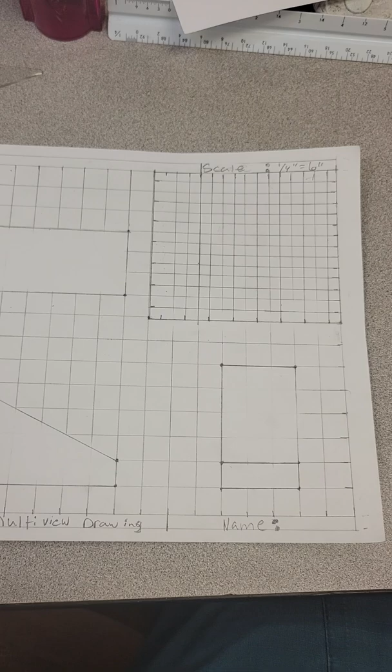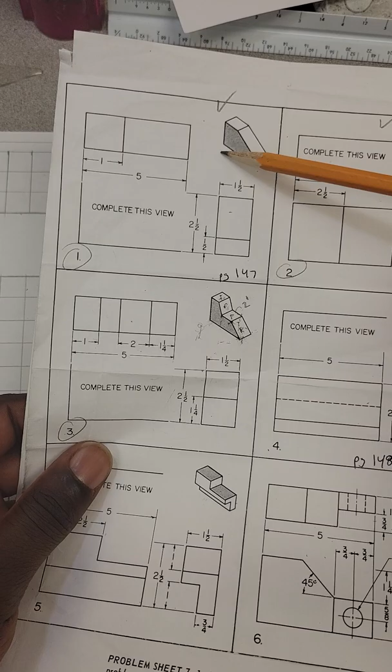So what we're doing is designing this front view, which you did already. We figured out our top, or our front view, which is this entire thing here. Let's mark this out for you. This will be your top, it's your T. And this, if I was looking right at it, my little guy or girl sitting there, it's the front view, which is F.

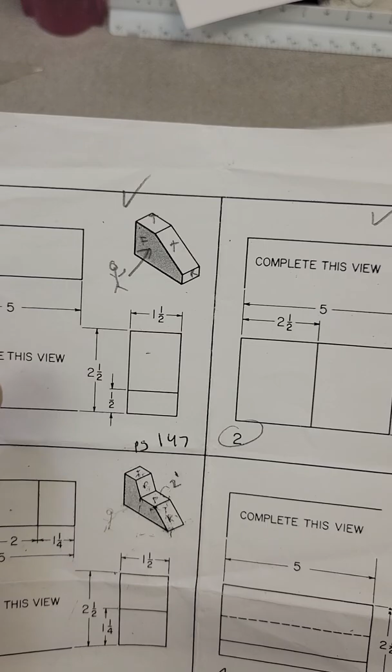All right, we're going to establish our little box. We'll draw this 3D drawing here. Just put that T up there.

Just to recap, I want you to come down over 8 from the top. Use your bigger box to mark out the smaller box. So you'll come over 1, 2, 3, 4, 5, 6, 7, 8. Come down 7: 1, 2, 3, 4, 5, 6, 7. Start that dot right there.

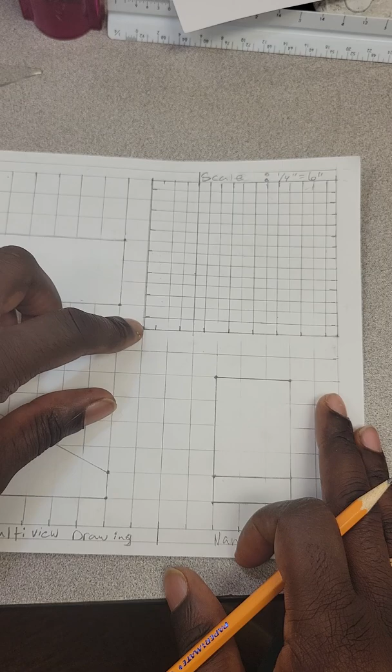Once you get that dot created, darken the box. Trace the line around.

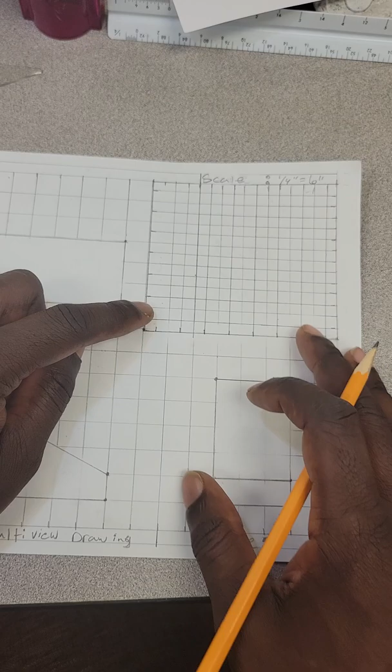That'll be the tornado or hurricane drill, so ignore that. So 1/4 inch that way, knock it out with quarters. Every other one is a 1/4 inch, as you can see: quarter, quarter, quarter, quarter, quarter.

All right, in this case, like I said, all you need is a ruler. We're gonna use a ruler and make this 6. Let's give you an example of your new 0, and I'll zoom in and show you.

And then you get your 1/4 inch that way. So 6 is your new 0, so that's quarter, half, quarter. Kind of cheat a little bit. Again, quarter, quarter, quarter, quarter, so on, with tick marks in between the two halves.

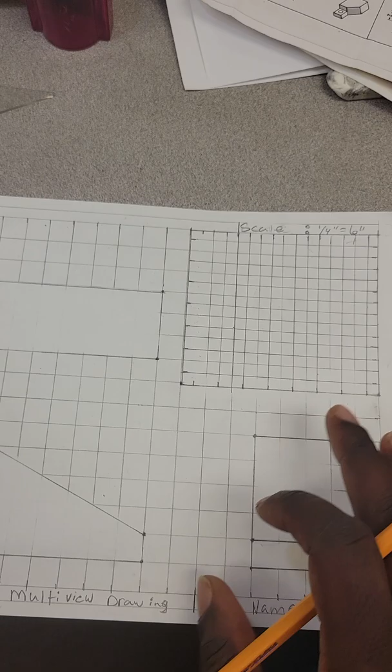All right, so we got that much done. Now let's go ahead and start the 3D drawing to get this bad boy rolling.

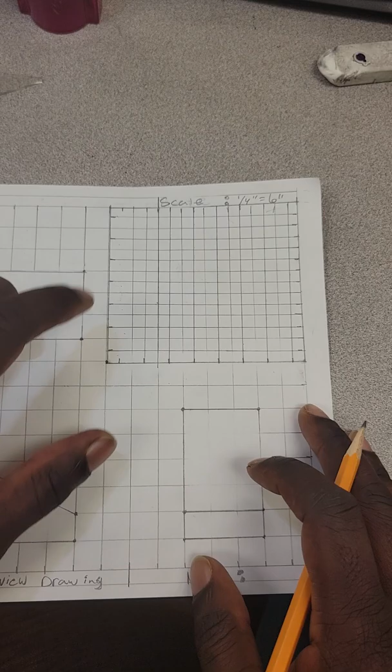All right, so let's walk this through slowly but surely. In this case, we got this going already. We got a 1/4 inch scale up top, equals 6 inches. So this is gonna keep the 6 inches. If we go any smaller, like 3, it's gonna get really long and take too much, so let's just keep to the 6 inches but keep the 1/4 inch.

So every quarter now we measure, it's gonna be our 6 inches, instead of our 1/2 inch equaling our 1/4.

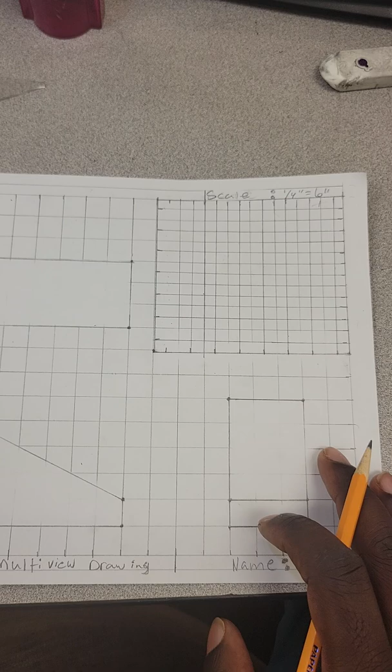All right, so let's get started drawing this thing. What I want you to do is use the bigger box to start your first point in your smaller box. So in this case, let's just go 1, 2, 3, 4, 5. We can go 1, 2, 3, 4, and 5, but we're gonna start right here, that little 1/4 mark right there, over 1.

Oh, I need to make my 1/4 line there. Hold up, I'm missing one.

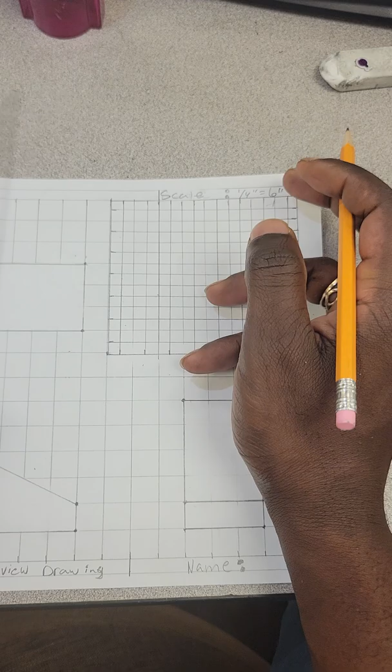All right, 1/4 line, so let's do it again: 1, 2, 3, 4, and 5. Start over right here in this corner, and you'll put a dot right here. So 1, 2, 3, 4, 5, and you come over 1 to start your grid.

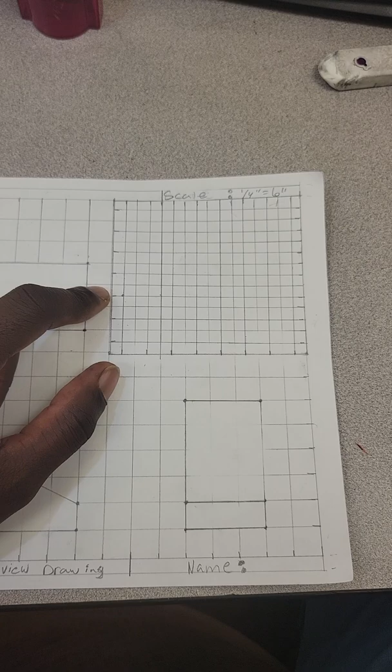And for tick marks, just to check myself, it should be 9 down: 1, 2, 3, 4, 5, 6, 7, 8, 9. Yes, that's your first tick mark.

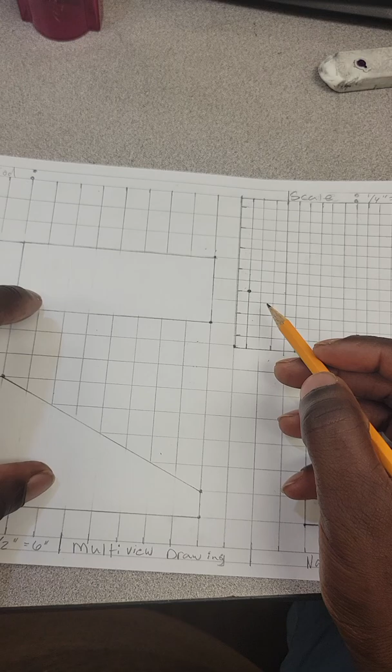So same thing we did with the 1/2 inch to get our front grid, we're gonna redo the same thing with our 1/4 grid. So all we're gonna do with our 1/4 grid is the same thing we did with the 1/2 inch grid.

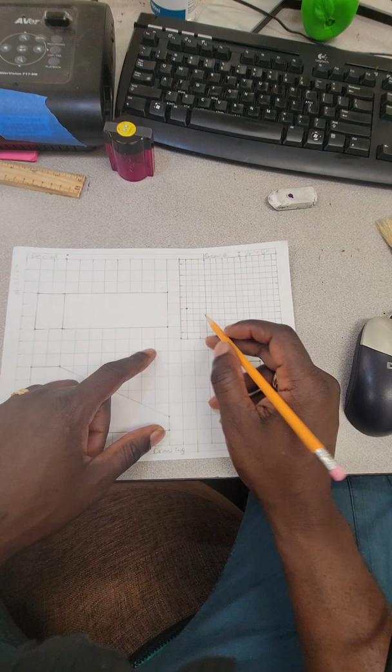So you're gonna start the base at this point. You're gonna come around this way so many, and go up so many on this particular one. In this case, we had to go 1, 2, 3, 4, 5. In this case, we're going 1/4 inch though, so 1, 2, 3, 4, 5. We'll keep it going, 5 tick marks: 1, 2, 3, 4, 5.

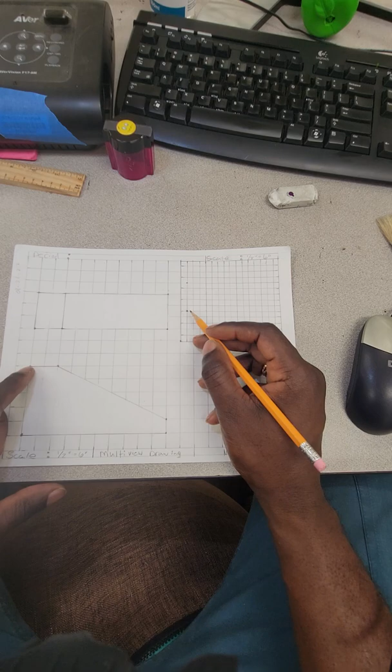All right, and then that'll give us our point here. And we go the same number we went this way. We went 10, so we gotta go 1, 2, 3, 4, 5, 6, 7, 8, 9, 10, to get our front view.

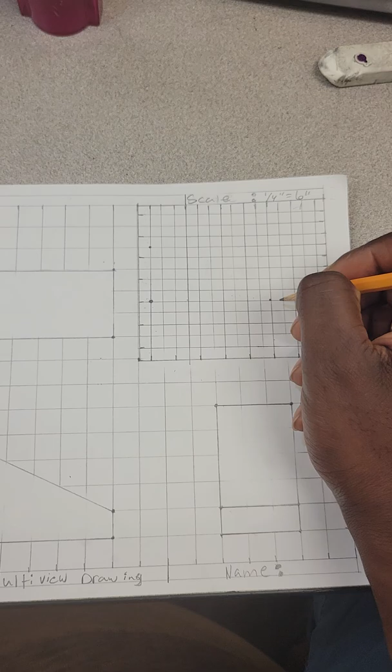Yep, go over 10. Let me zoom in real quick. And then we go up an inch, a half an inch, right?

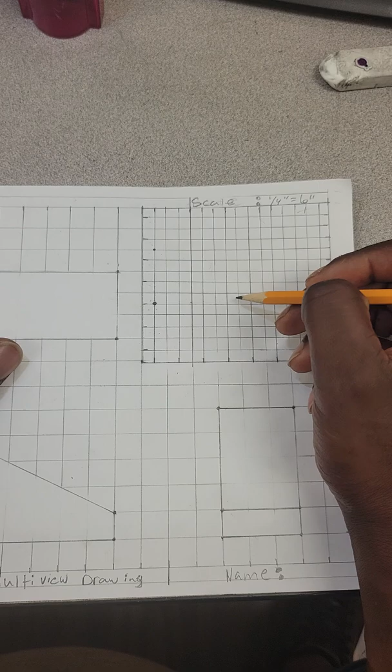Creating our right view. In this case, we're going to do a 30-degree angle at this point. I know in the picture it shows the 30-30, but on this one, we're going to do oblique with a 30-degree angle. In the next drawing, we're going to do a 2 at 30-30. So we'll get back to isometric. Right now, it's oblique.

All right, so let's finish out our top, which is going to be 2 boxes over. Same thing you see on the big one, on the front view. So again, we're doing this now, 1, 2. But now every quarter inch is 6 inches, so it's the same concept, 1, 2.

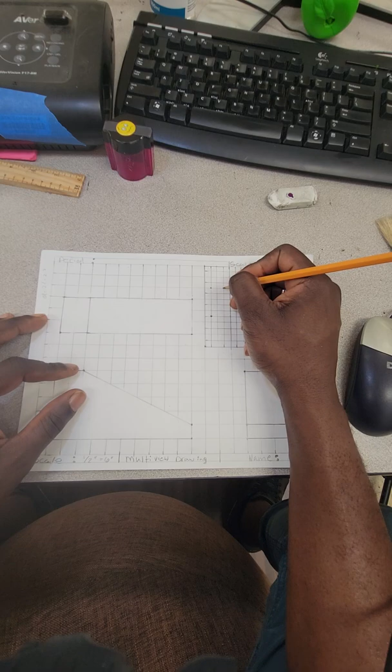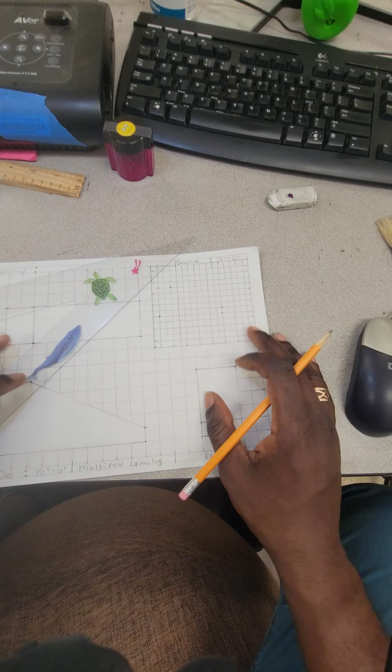And now at this point, we can connect our front view line going this way. Let's just do that. So connect those boxes. Light lines because you don't have to erase. And connect these boxes as well. It's kind of already there already, so you can kind of darken it up a little bit.

Same thing here. Same thing here. All right, so this line is kind of off a little bit, so let's just use a line that's already existent there.

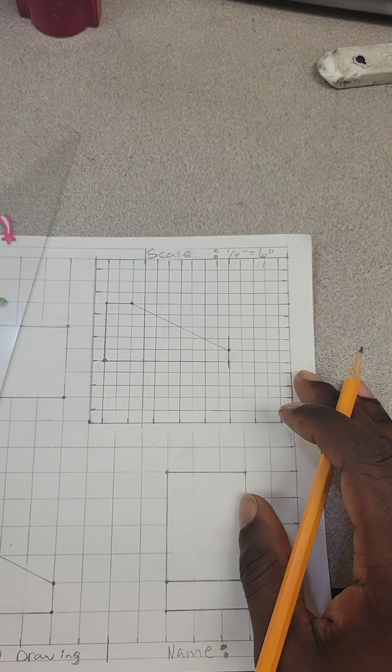All right, now what we want to do is create our 30-degree angle. That's established with the 3, 4, 5 method, or whatever you want to call it. In this case, we're doing a 30-degree angle, so we know 2.5 this way, and then you gotta go 1.5 inches up off this angle here to get our 30-degree angle. So that's 5 tick marks.

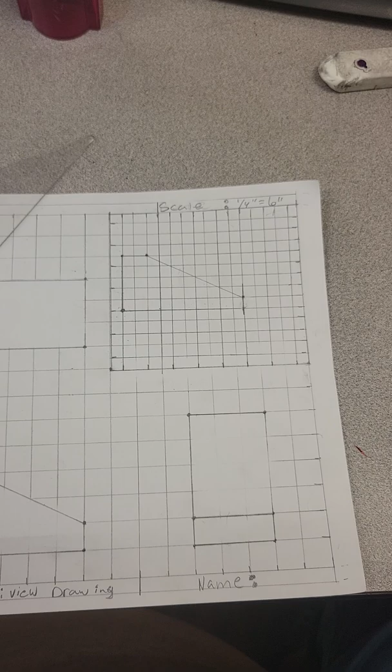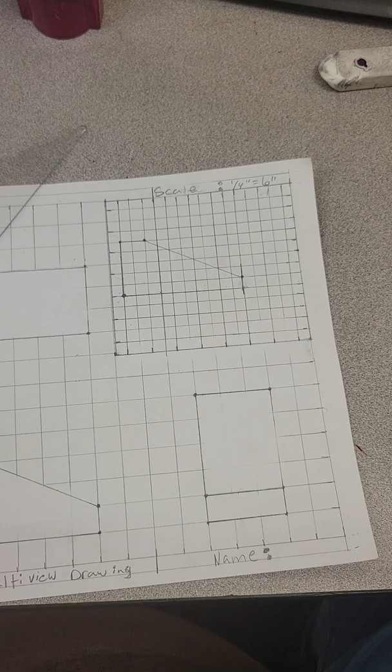And in this case we're gonna go... let's just do this. Hold on one second. All right, so we're gonna create a 30-degree angle. We gotta go 2.5 over, 1.5 inches up. So in this case, we go 1, 2, 3, 4, 5, and then go up 1, 2, 3. This is our mark to create our 30-degree angle, so just make a connection. So again, we came over 1, 2, 3, 4, 5, went up 1, 2, 3, came up 1.5 inches. So this is 1.5 inches, this mark here.

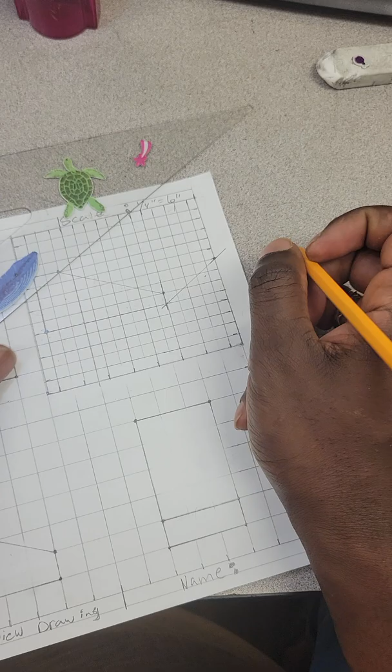And then you're gonna draw the bottom line first. And then we're gonna go up 1.5 inches. Oh, we know this is 1 inch, a half inch. We're gonna come up a half inch to grab this line across here. And this will give us a right view angle.

All right, and this is his benchmark at this point. It's a 30-30. We're kind of going a little ahead of ourselves, but we got this already established at 30. Now we got to come over, just go back to our drawing.

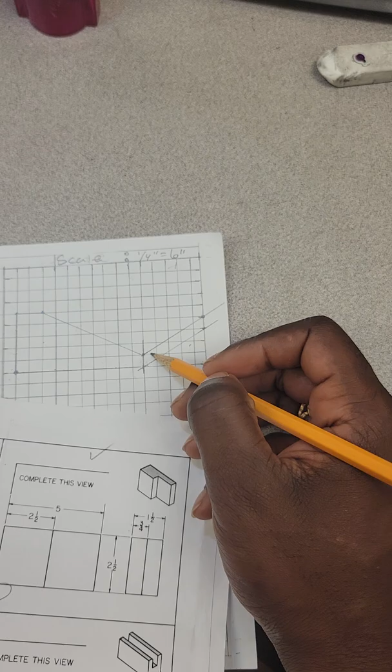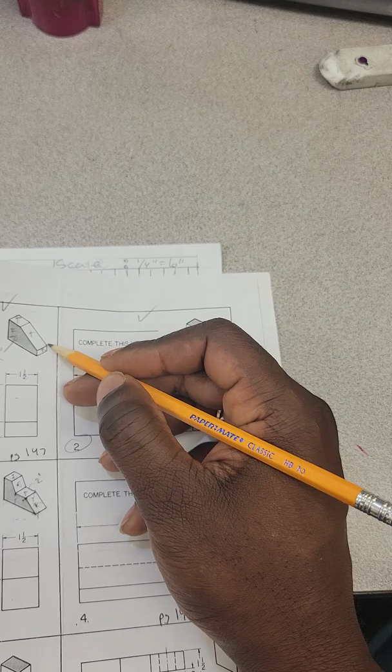We gotta come up, we gotta know we gotta go a half inch. Our line from here to here is 1.5 inches. This is 1.5 inches. So we gotta come up 1.5 inches on this line here, 1.5 inches on this line here to get this little puka right here. So 1.5 inches, because why? Because this is 1.5 inches. We know this is half inch up, which is that. And we had to go 1.5 inches to get this little cube right there.

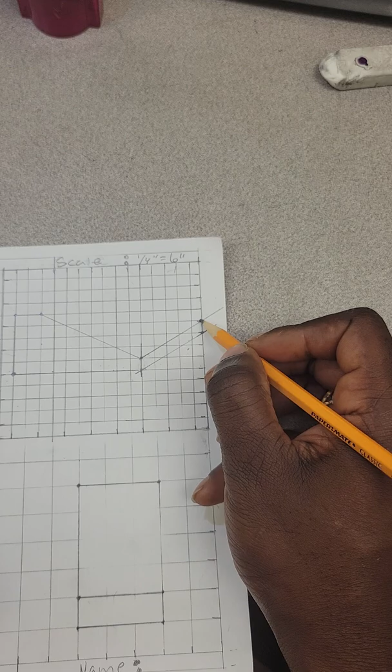So we went up a half inch, came up a half inch. Now we're gonna go 1.5 inches over on our line, measure 1.5 inches. At this point, you can use your ruler. If you don't feel comfortable using a box, you can use your ruler on this one.

And that's to get that line. So let's do 0. Every quarter inch is a half inch. So 1, 2, 3, 4, 1, 2, 3, 4, it's 1 inch. 1.5 inches is right here. And same thing there.

Again, check it. And you're gonna draw your line through here, straight up, cutting through there. Let's just zoom in real quick. We're gonna cut right through the 2 lines that intersect with the line going down, and it's gonna be really tight in there.

And again, I'm up just off that thing. I'm gonna erase that. And I'm gonna go right through there. Check my 1.5 inches one more time.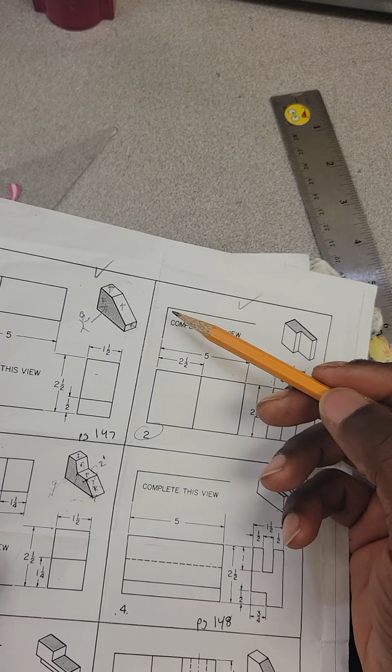It's really tight, and we also got a small drawing. All right, so we got a 1.5 inch line, 1.5 inch line. We're duplicating our right view, which is right here, with this back line. We're establishing it right here, based on this drawing here.

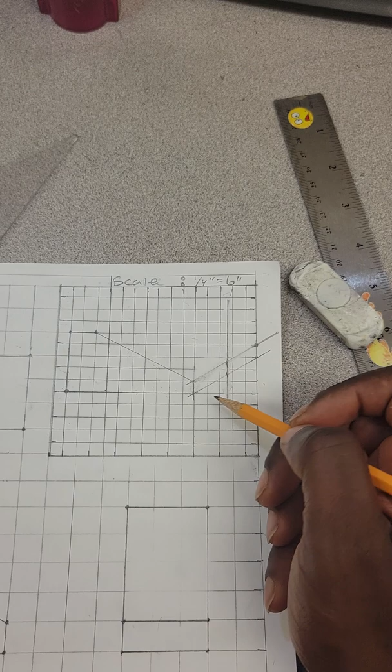Now it's gonna get really easy because we know a couple tricks already at this point, since you watched a couple videos and already know how to start establishing this back line here. In this case, we're gonna do it using the same concept we did down here, 1.5 inches, up 1.5 inches. I'm actually gonna put this in red really soon, so you guys can see the difference of the two we just did, so you know how I got that. So this is 1.5 inches, which is 2.5, and this is 1.5 inches going up. And I just went a half inch more, grab a second.

And then same thing back here. So whatever I did here, I can do the same thing up top to get my two back lines that way.

All right, so to get this back here, we're gonna go 2.5 inches this way, and then 1.5 inches up. So from here, 1, 2, 3, 4, 5, then go up 1.5 inches. 1, 2, 3. That'll give me that back line back here.

And then to get this as well, I'm gonna go 1, 2, 3, 4, 5, up 3, 1, 2, 3, and it'll give me this line here. But I want to be 1.5 inches on this line to get that 1.5 inches on this line to get these two, and they connect to here. I gotta just connect my two lines. So let me just do this right quick.

All right, you don't have to worry about this, but you want to measure 1.5 inches on this line, 1.5 inches on this line, and then you connect this point to this point. Then you have your square point in the back for this.

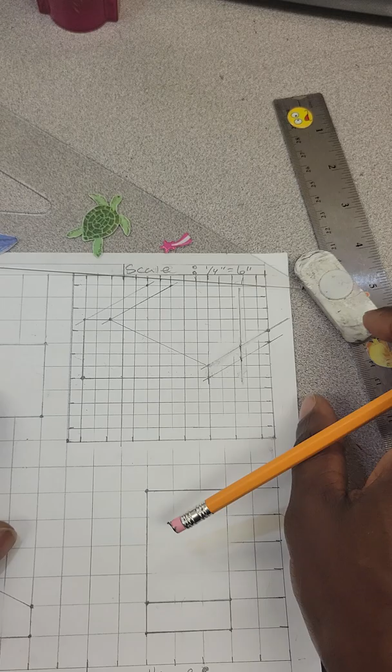Quarter inch and a half. Quarter inch and a half. And you're going to connect these two lines going across here to get your back piece.

All right, I'm going to connect these two, because that's our 1.5 inch mark. And we can zoom in to show what I'm doing. I'm connecting these lines going right through the origin.

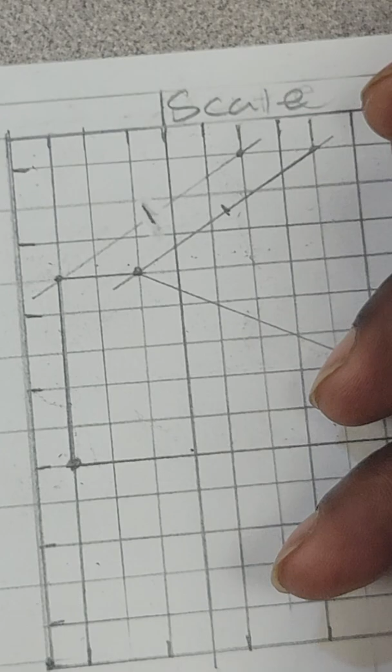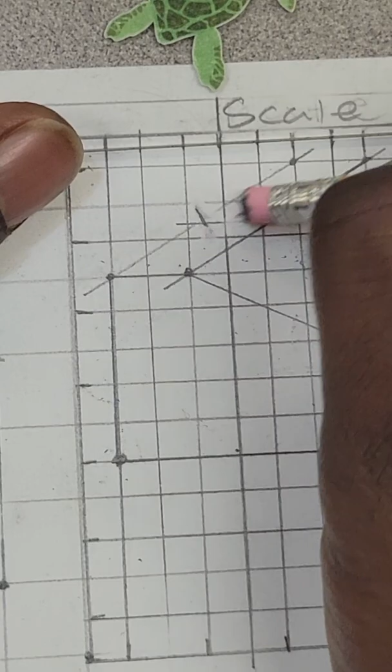Try to get my 1.5 inches looking better. I'm gonna connect these two lines going right across it. Let's get that line a little better.

Kind of tricky because it's so small when you're trying to get in there with this. Might as well erase this too, because what's going to happen is we're going to actually make this where you can see the actual 3D model.

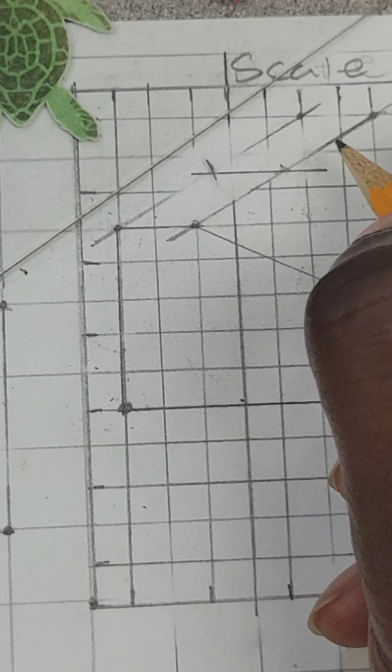Cheat off like a 16th off, so you get that pencil lead through there, and connect that line again. So cheating it off the line about a 16th kind of gets you back on top of that line.

All right, so at this point we're going to go ahead and start getting this line up down here too as well. The lead on this, the eraser on this pencil is not so good. All right, now we're just going to connect the two points, this point to this point.

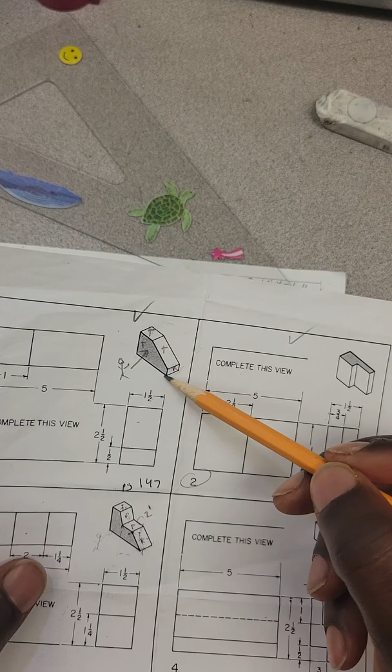Again, that drawing is off of 30-30, but I'm gonna save that for another day, so I won't confuse you guys so much when it comes to this. So this is an oblique drawing, on a 30. So when you look at the picture, it's not gonna be so much like this one because this is on a 30 and an angle at a 30. So it's 30-30 here. We went from straight, then 30. So we're getting half of the view, but on an oblique angle.

And I'm gonna erase this center mark. We don't need it, but I'm gonna actually put in some red tick marks to show you how we found our angles. So we went over 1, 2, 3. Let me show you now. This yellow shows up, I think that shows up well. Let me get another color for you.

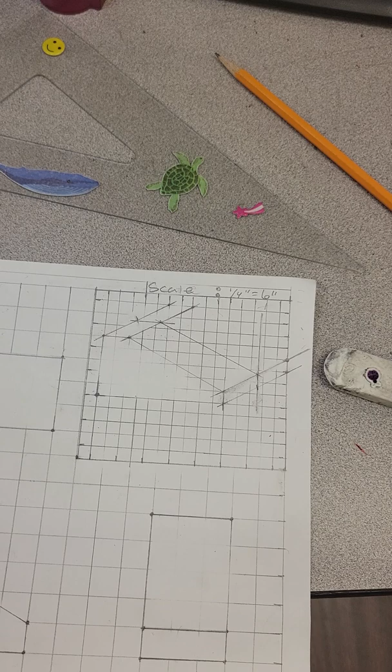Alright, to show you what we did, we came over 1, 2, 3, 4, 5, and we went up 5. So we went up these tick marks here. These are hidden lines again. This is your 1.5 inches. So you go 1.5 inches, 2 inches this way.

So 1, 2, 3, 4, 5. Again, the common number for a 30-degree angle is 2.5 inches. 1, 2, 3. We got here. So we got this part in the back. Now to get this one, it's the same concept. To get this back number, which is an inch, between here is an inch.

We came over 1, 2, 3, 4, 5, and we went up 1.5 inches, which is 3 tick marks. So when you're confused, just go by the tick marks and it'll get you what you need. And the same thing here. We went over 1, 2, 3. I'm doing hidden lines to get these points to you. And then we get this as well.

And this is how we created that line. And then we went 1.5 inches up, or 1/2 inch up, because this thing is boxed at 1/2 inch. And you connect these 2 points. And this is how you do oblique 30-degree angle drawing to get these. And you connect that. Let me erase this so you get a better picture. And that's pretty much it right there. Let me darken this up.

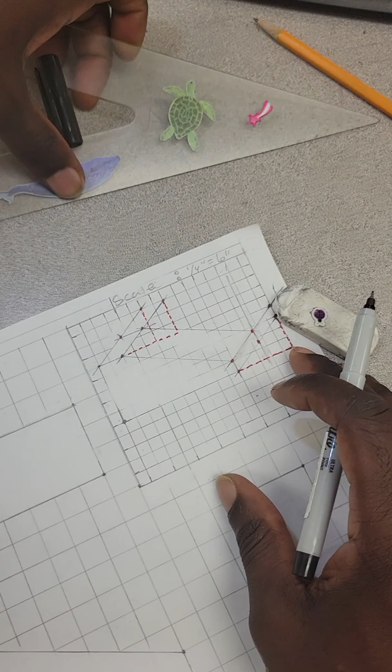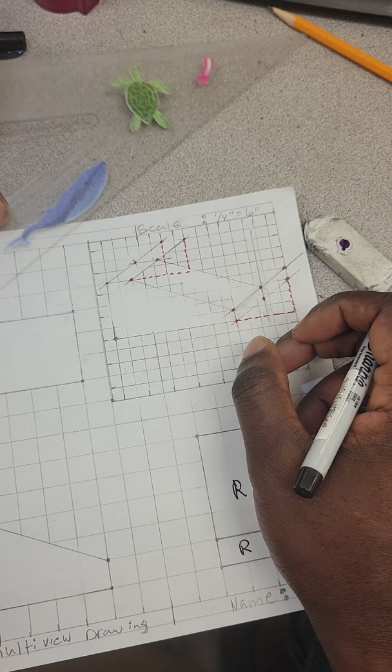Oh, in this box here, let's go ahead and put your T for top, F for front, and then R for right. And this is another R for right. And I'm gonna darken this up. So we did this on a 30-degree oblique drawing, which means if you go back in the video, it shows you exactly what you have to do to find that.

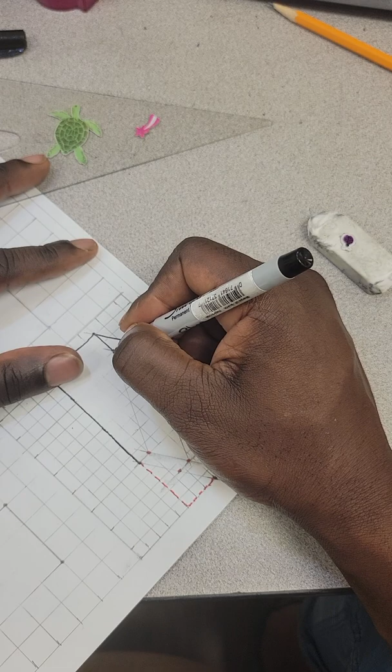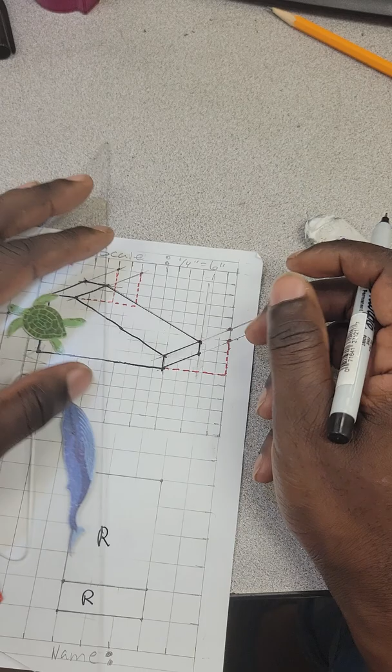Alright, come and get this angle. Sorry, blue. We're gonna erase everything we don't need. That's actually your points you need right there, and these are just extension lines off the original grid to give you a better understanding of what it took to get to here and here.

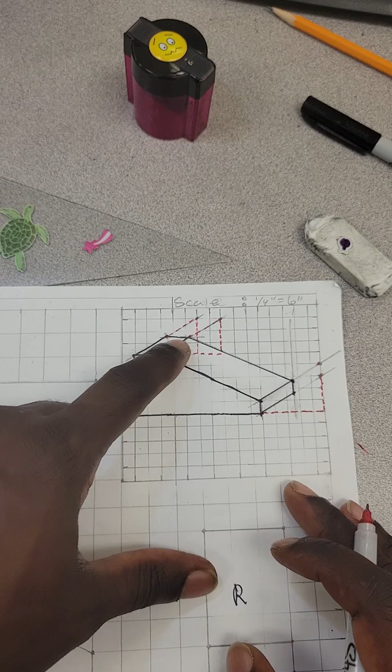So these again are indicators of your 30-degree angle. You did your 2.5 inch, came over 2.5 inch to get this point, and then they get this point, and you just measured on this line. You created an inch and a half, an inch and a half. Why? Because this indicated to you that this back here is an inch and a half, inch and a half, and that's how you find your angle to match these angles down here.

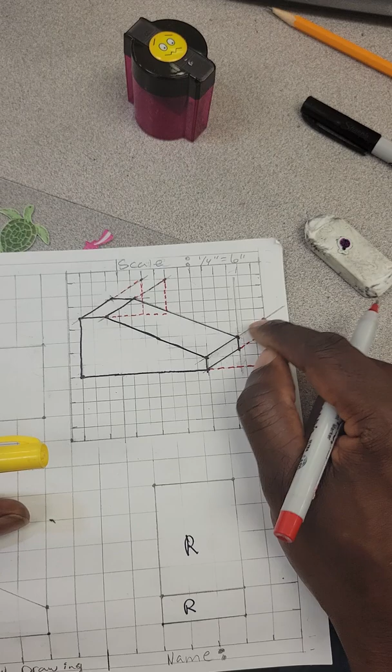And again, I'll just make these lines here. And this came up an inch and a half, a half an inch to get to here. So I'm not gonna put too much in there, but that's exactly what you'll have. Let me zoom up. And that's your overall dimension of your oblique drawing at a 30-degree angle.

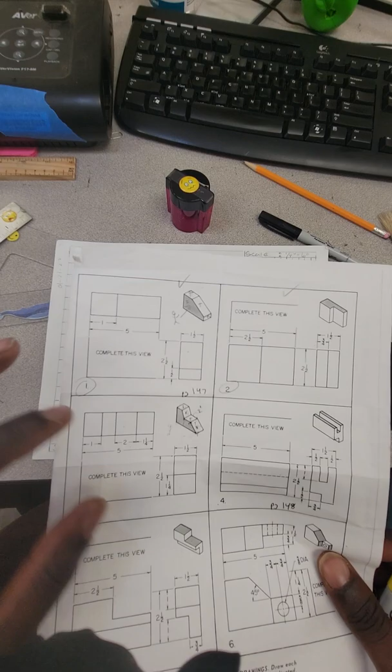Again, this is on the 30-30. We'll get to it. We'll put this on the 30-30. So you get enough 30s, and don't worry about that. You'll get some 30s in. But this one, I just want to make sure to show you guys how to do oblique drawing. If you want to train on oblique drawing, and then go 30.

So let me erase stuff we don't need anymore so it can stand out better. When you outline it first, then you can erase what you don't need. Then you can see the actual picture much better. And do use a straight edge when you're tracing. It helps keep the lines crisp. And we'll get rid of this stuff in here.

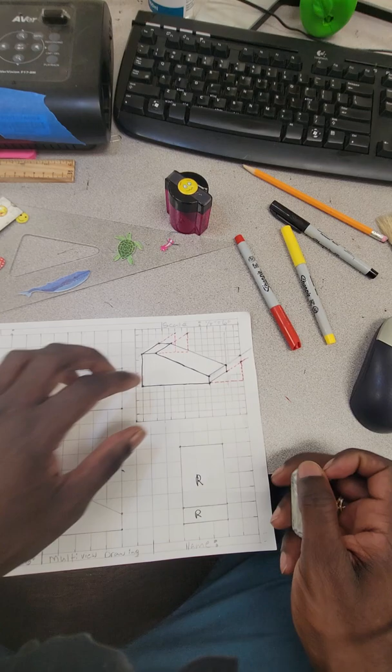Again, you leave up grids on the outside, but then you can use them to track it. You know what you did by using these lines here. You know, inch and a half, just to make it clear to you what you're doing. You can count 1, 2, 3. Again, if you have a hard time figuring out how to do the 2.5 by 1.5 to get the 30-degree angle, just count 5 tick marks to the right, 3 tick marks up, and that's what you'll get. Let me zoom in.

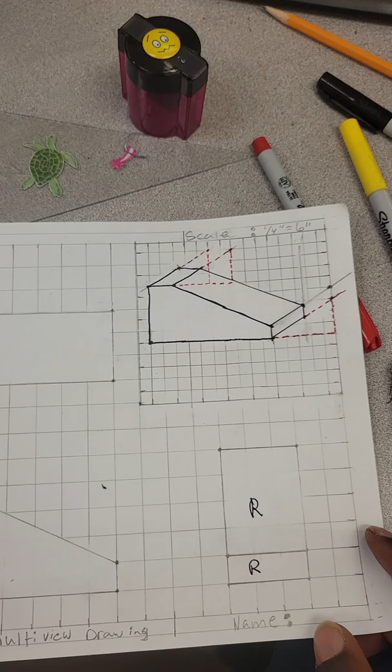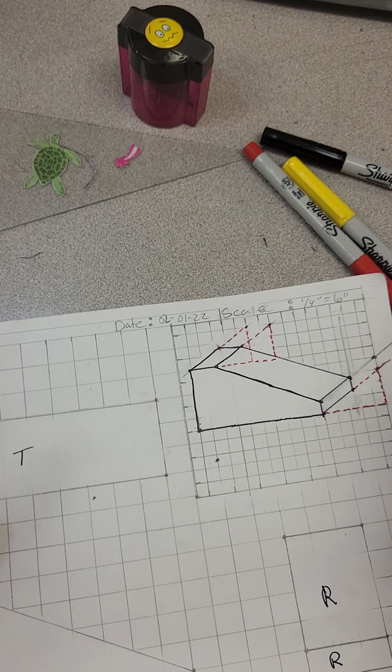This is 02-01-22. Happy birthday to all you folks. That's in February. All right. Well, you know how I do it.